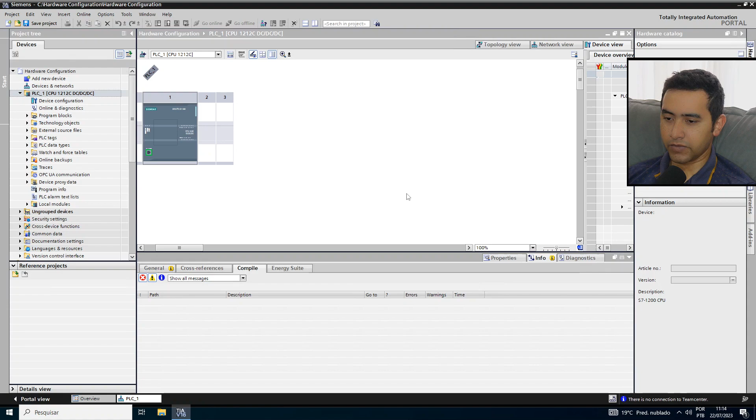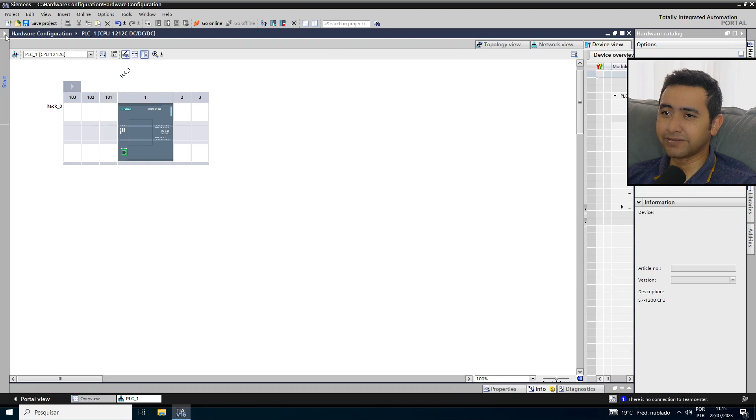Right, then we have the version of TIA Portal. This screen is amazing because the first time you work with TIA Portal, it's possible that you think it's really hard to understand every window screen. I can put here from left, this from down. It's a lot of things to understand about TIA Portal, but the best course, the best training for us is to use this tool. The more you use TIA Portal, the more you will learn about this tool.

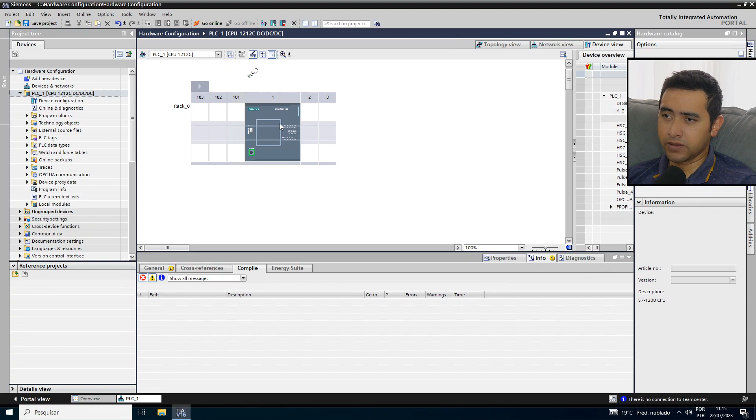All right, then this is the simple form that you put something in hardware. I don't like this form. I prefer to already start this screen and go to the catalog, that you cannot see because I'm exactly in front of this catalog hardware, where I put the code of CPU and search here and put it here, put it in the hardware configuration.

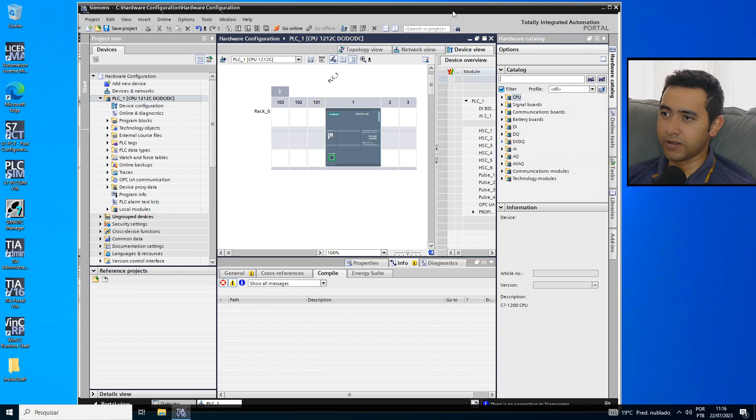All right, I have here our CPU. I will start the PLC simulator, PLC Sim. PLC Sim is a tool for simulating CPUs. But it's a great tool if you don't have a CPU in hand.

I have a small LOGO! and a 1214 CPU, but it's hard to put here on my desk and it takes some time from me, and I don't have much time to spend with this. I use the PLC Sim Advanced to show you, guys.

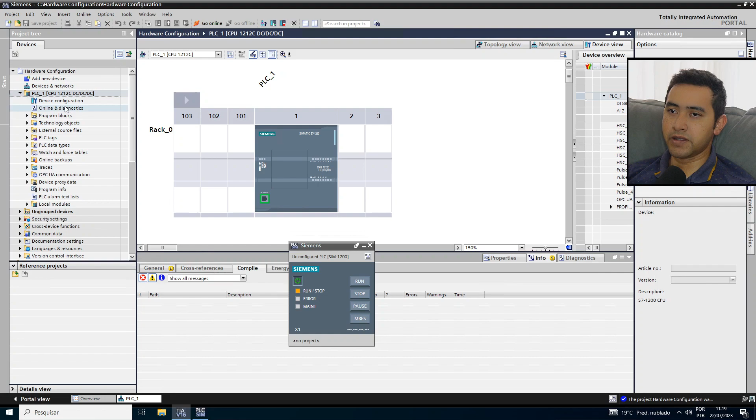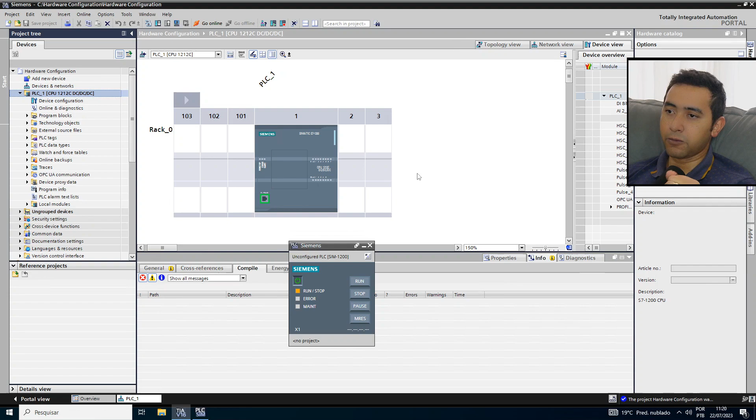I will start the download. Every time you create a small project, it's important to do this because you can execute the download and see if your CPU is okay with the online CPU, okay with the offline CPU. Because, I don't know, we forgot about the version that we can see here.

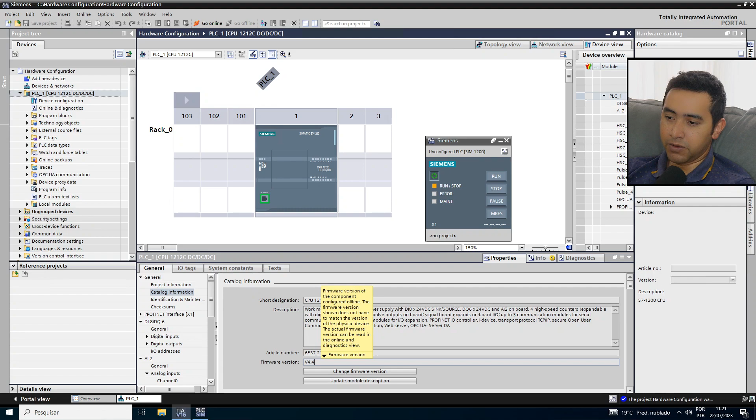We forgot to put the real version. We put version 4.2, and the offline version, the real version, is 4.4, like this. When we download the hardware, that's a discrepancy, there's a difference between the online and the offline. Every time you start a new project and you have the CPU - in some cases you don't have the CPU yet, then you will not be able to do this. But when you get a CPU in your hands, make this, it's a really important thing.

All right, I will make a download. I will change the name for my CPU. Then I can change here, press F2, or here I can change here.

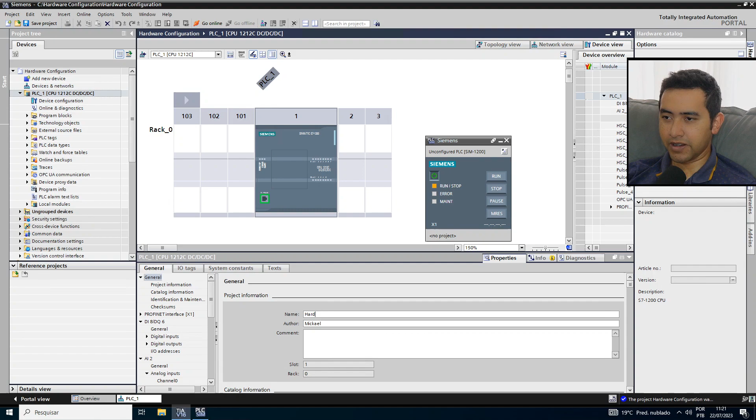Training International. Hardware config. Hard config. Right, this is the name of my CPU. Config.

I will save the project. Save project, it's a really important thing, because sometimes the TIA Portal crashes. Then if you don't have the project saved, you must do again what you did before you save. That is why you must never forget to press the save button.

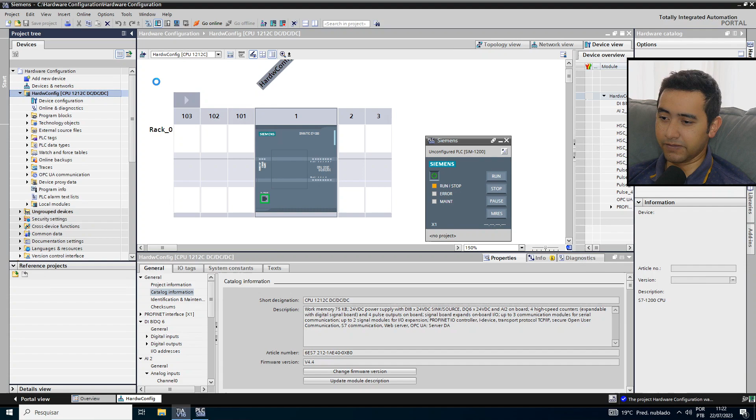All right, let's download the first project that we will work on, and we'll compile. By the way, he's finding my CPU.

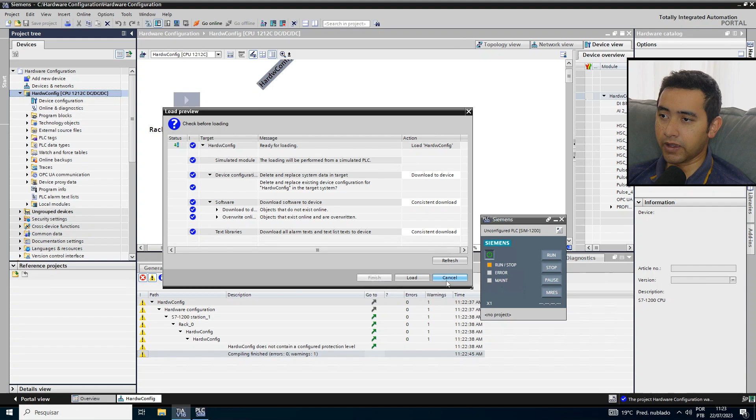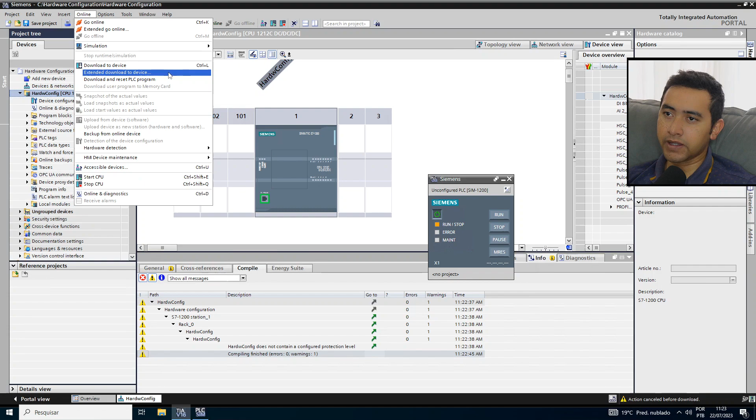If you started the PLC sim for the first time, you must configure something here. In my machine, it's already configured, but in your machine, you must do this, and I will show you now. When you do this for the first time, you must come here, online, and go to extended download to device.

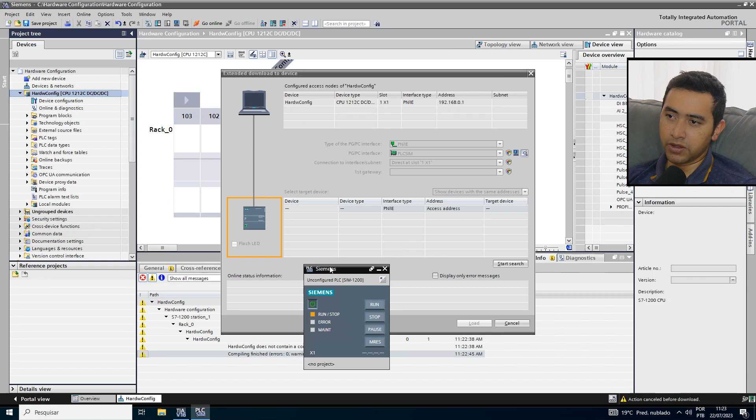Then you must configure these items: the PG/PC interface is PLC sim. With PLC sim, the TIA Portal will search a CPU in this program. I already put a 1200, and I put the turn on switch button. When I start search, it's probable you will find an okay CPU common. IP address is default.

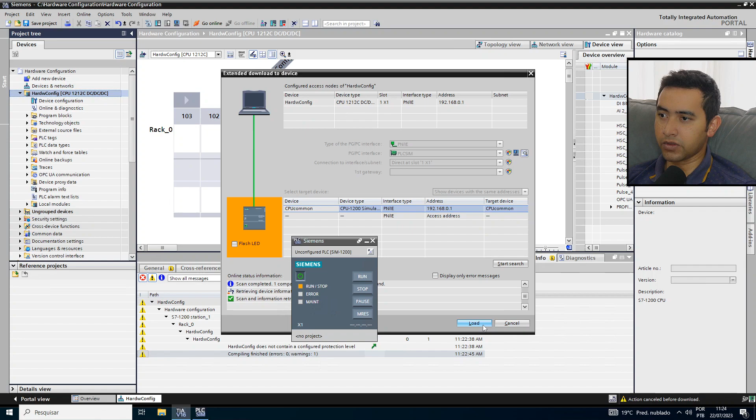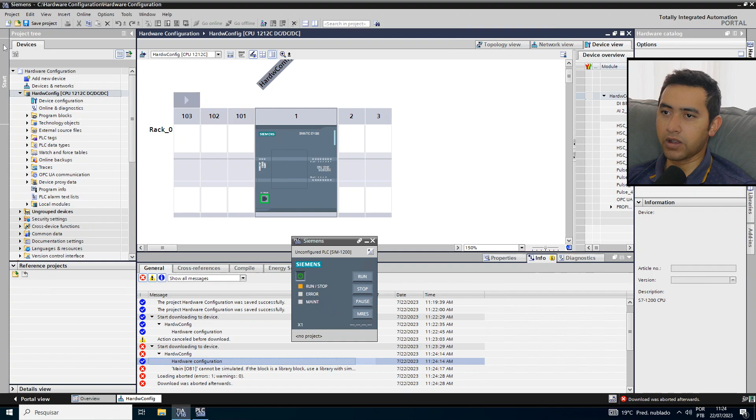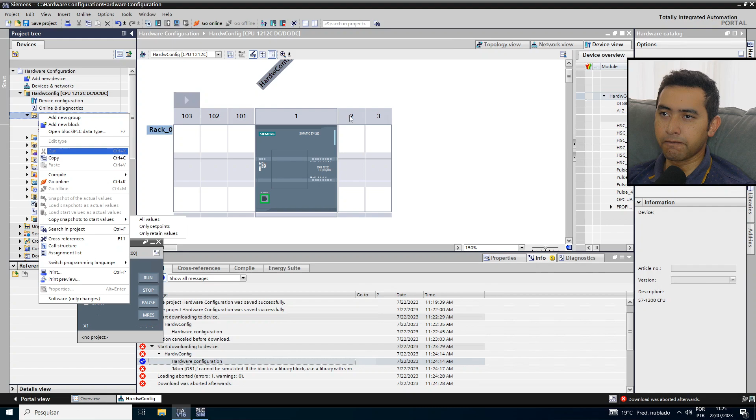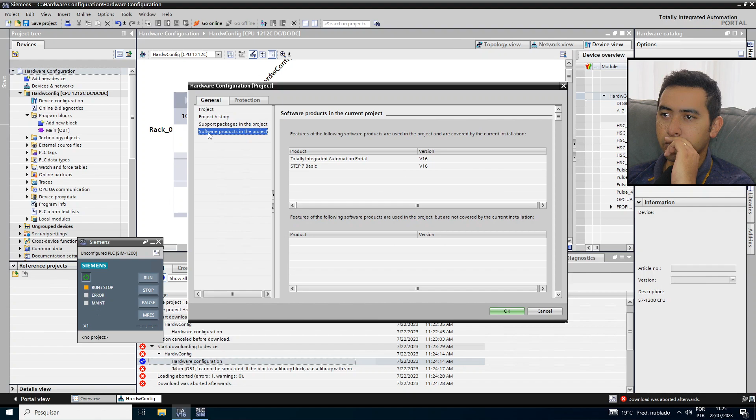So I will load. Right, I think I forgot something here. Not, I think it's here.

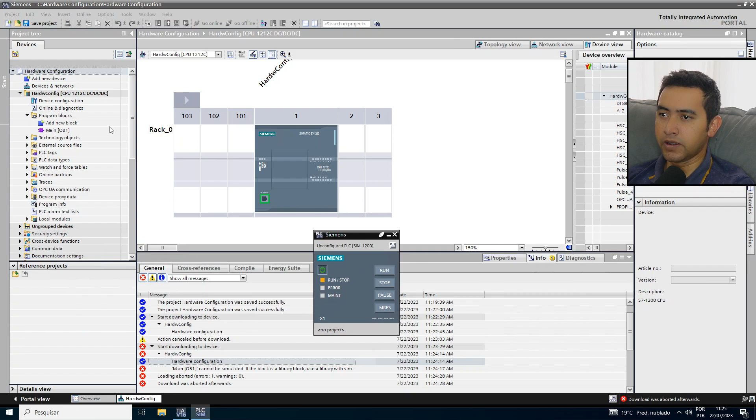All right, I forgot. You must come here, name of project, properties, and support simulation during block compilation. Forgot this already. All right, I'm sorry for that, we lost time here, but now I think it's going to work.

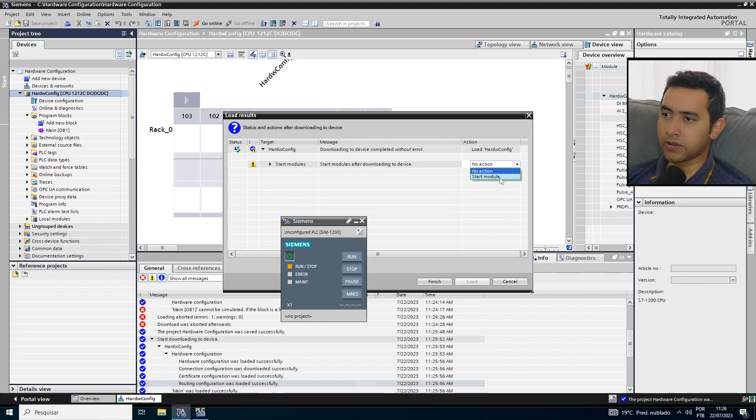All right, and it works. My module, the CPU, in the first time will be in stop, not running. Then I will put it in start to running. In my PLC, it's exactly the same flash as a real CPU. Then you put it to stop, to running, it will flash sometimes, and then be green continuous, and now I can go online.

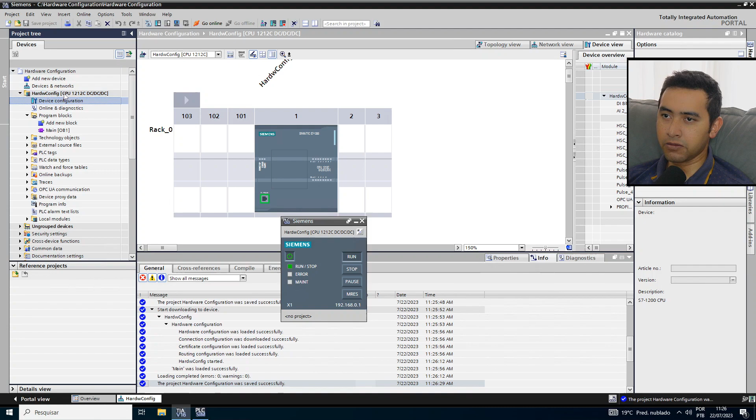That's the first thing you must do, because here we can see if the version of our CPU is okay. We use a virtual CPU, so we don't need to worry about the version. But when we use a real CPU, we must pay attention to this.

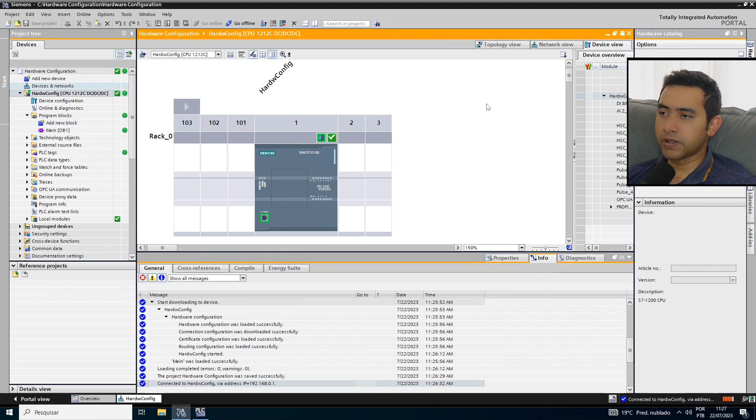All right, then hardware configuration is here. All right, we put our first CPU, you can see here, right? But what we must configure in a CPU is a really important thing.

In the S7 300 and 400, there are a lot of things we must configure before we start a project. That is why in the beginning of this course I will not show S7 300 and 400, because it's hard to understand a lot of configurations. And TIA Portal isn't made for S7 300 and 400, it's made for programming the 1200 and 1500 CPUs. That is why we use this type of CPU, because it's easier to understand, easier to program and configure the hardware.

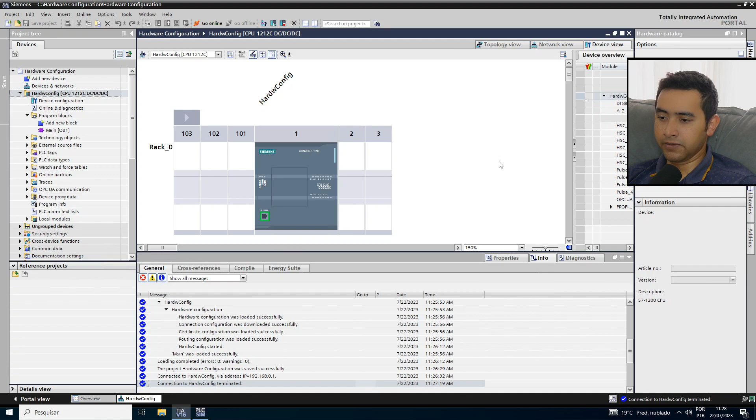Then I will put here my CPU, and now I will show you some types of configurations.

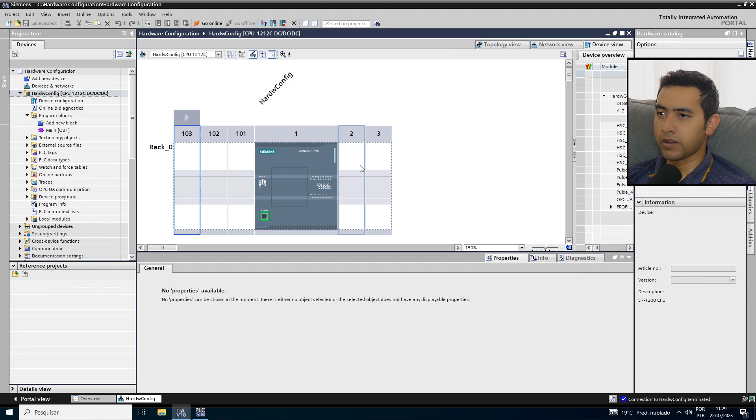All right, I will click on CPU. Ah, I forgot something. This CPU, the 1200, I have a kind of rack. We don't exactly need a rack like with the S7-300 and 400, but with the S7 1200, I can put something here to communicate. Communication modules will go on the left side of the CPU, and in rack positions 2, 3, and upward we must put I/O modules for inputs and outputs if our CPU doesn't have enough for my application.

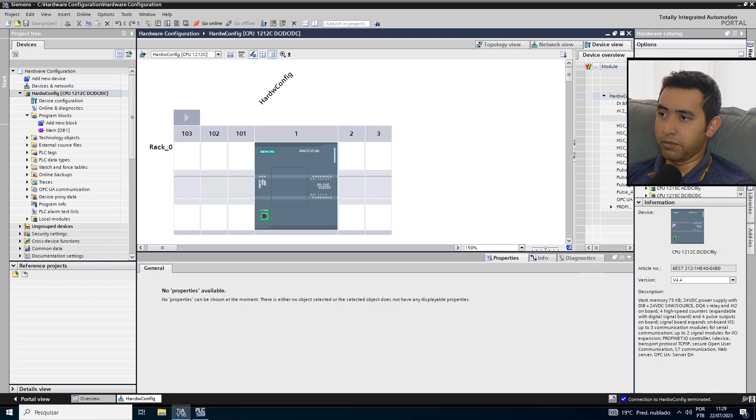Right? Then what's the configuration that we must do basically? I can change the name of the project, right? I can see here the type of CPU. Let's think about it if I put the wrong CPU here. Then I can find the new one, or I will change the CPU for a new one. Again, pick one CPU from the hardware catalog.

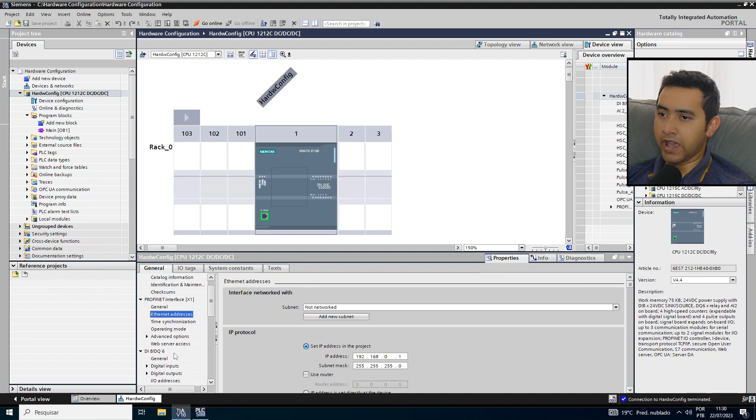I'm in the front, but it's not a problem now because it's not our class today. I change the CPU and continue here in configuration, Profinet interface. We have here, we will create an IP address, then the S7-1200 has Ethernet connection.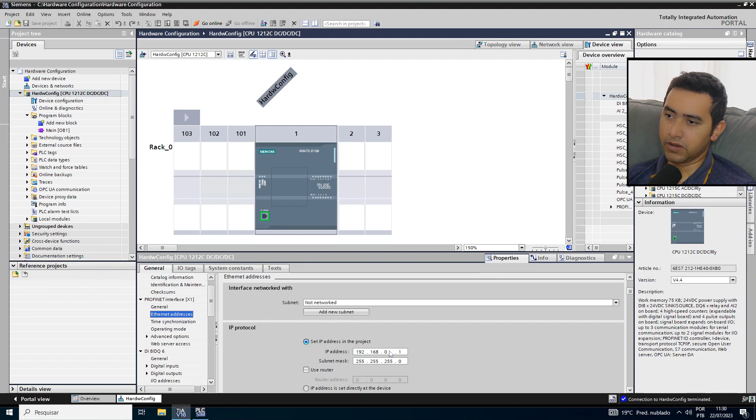It's Profinet, or RJ45. We put our PC link, not laptops, directly on the CPU. This is the default IP address. We can put the router if you need it.

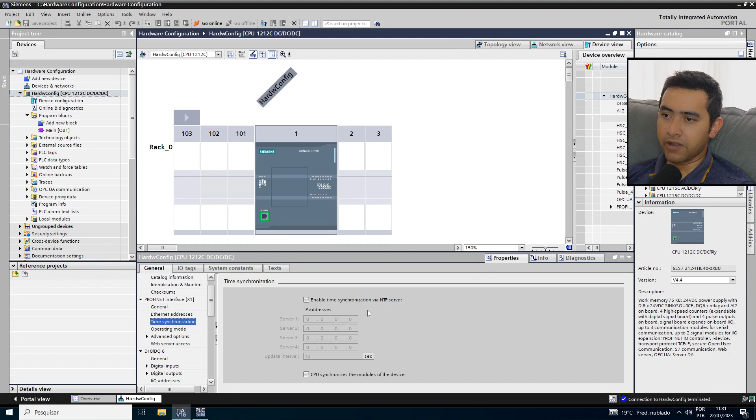Device name from Profinet. I don't know if you know, but in Profinet everything has a device name. If you have an NTP server, time synchronization of the CPU via NTP server sets the date and time of the CPU. You have the operating mode, then it's possible to use another CPU like an I/O device. In the past this was called having a PLC master and a slave, and I/O device is like a slave from another CPU, but it's not our case here.

It's not important now. Web server, then the web server makes it possible to connect to the CPU with a normal browser from the internet. The configuration from our DIs, and there are a lot of configurations here like time filters if you want to put them.

The range of addresses, then by default, when you create a CPU, the first address comes here, then the first inputs that you have will start 0.0, then 0.1, 0.2, until 0.7, then 1.0, 1.1, 1.2. The CPU has an analog input, and there are a lot of configurations now, but the most important are the web server and the memory.

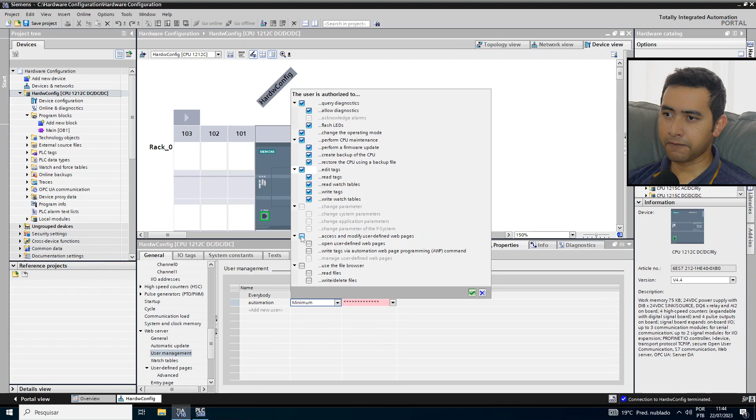Report. We create a user. We will access it by web server. We put the things you must set if you want to use the web server. I put everything. I create a password that only I know. We put automation too.

I can put watch tables if I want. It's possible. I don't want to put this now. Time of day, then you could put your time in your country. It's really just to see now. Well, this is mine, Brazilian.

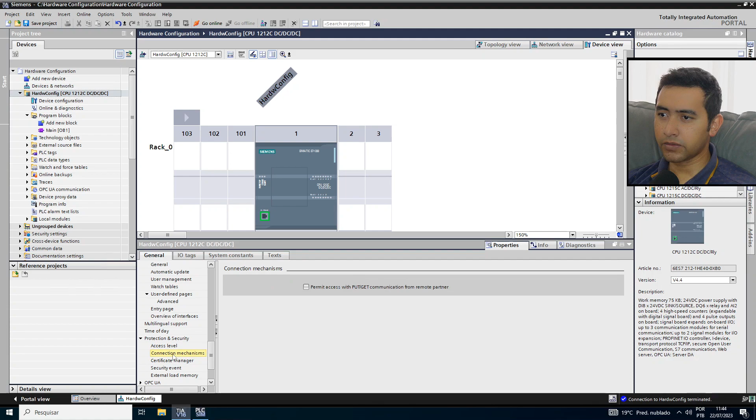PUT/GET when you must create a connection between another CPU. It's mandatory to flag. I don't flag this now.

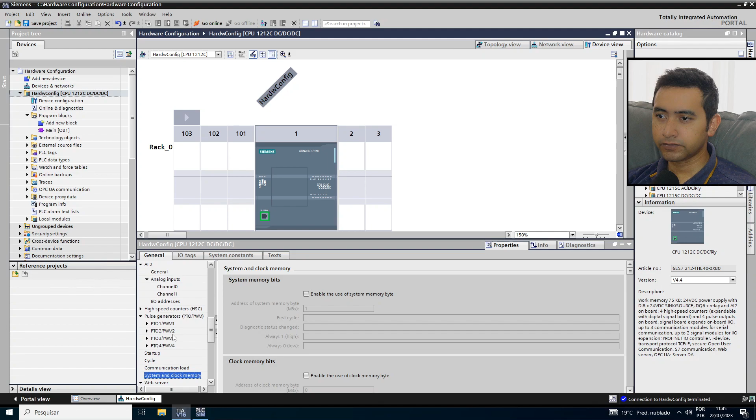Searching for the memories that I forgot where they are. All right, I found system and clock memories. This is really important to activate. Then you flag this and this. You have some tags that are really important, like first scan.

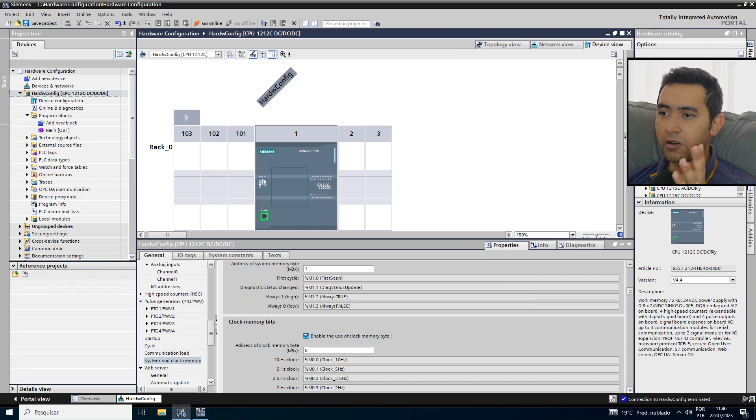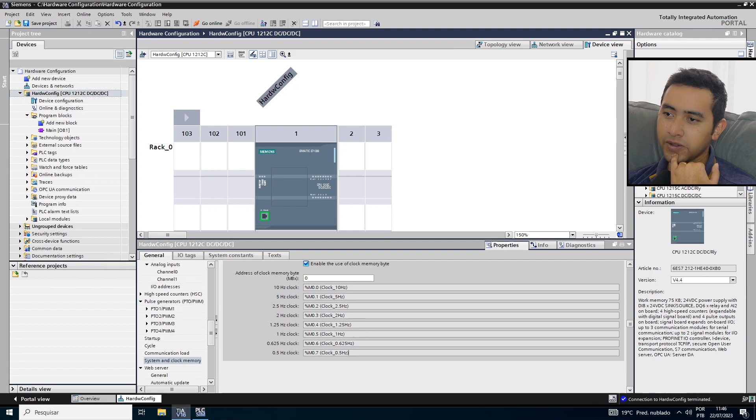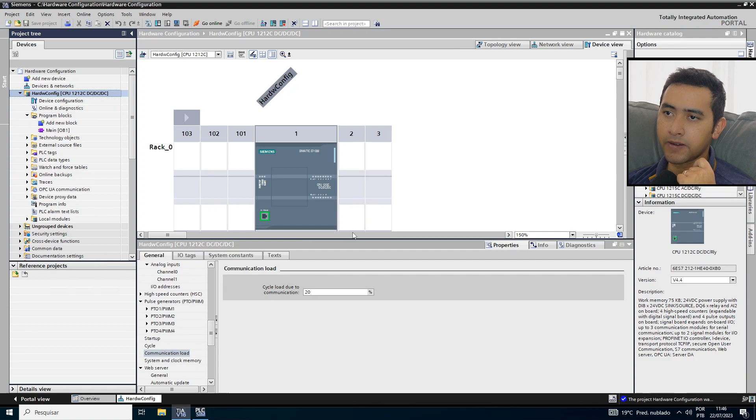I changed a configuration in the hardware. Then, if I want this configuration to go to the CPU, because when I change here, I only change it in my project, but the CPU is still running. It's running with the last project that we loaded there. Then, if I come here, it asks to stop again because I changed the hardware. Then we will stop it. Load.

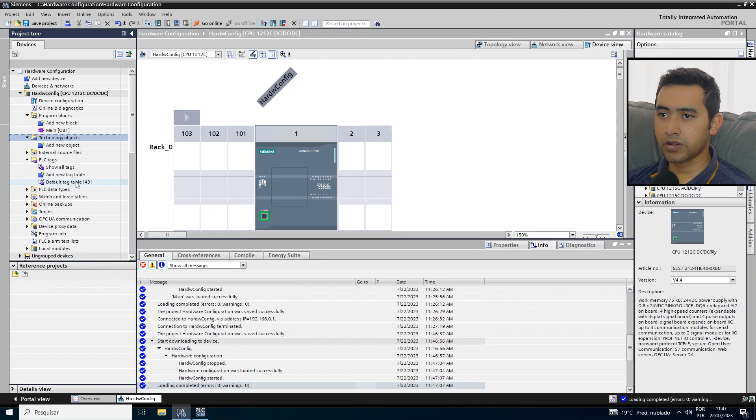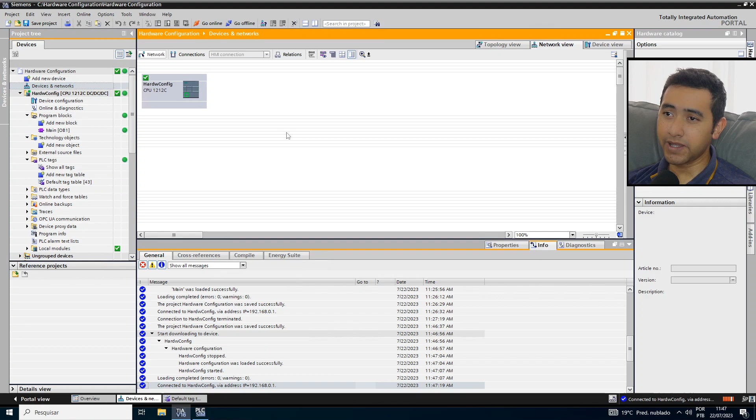It's the first video. I think I will put a second part because the recording now is really longer than I wanted. I hope that you're enjoying this video.